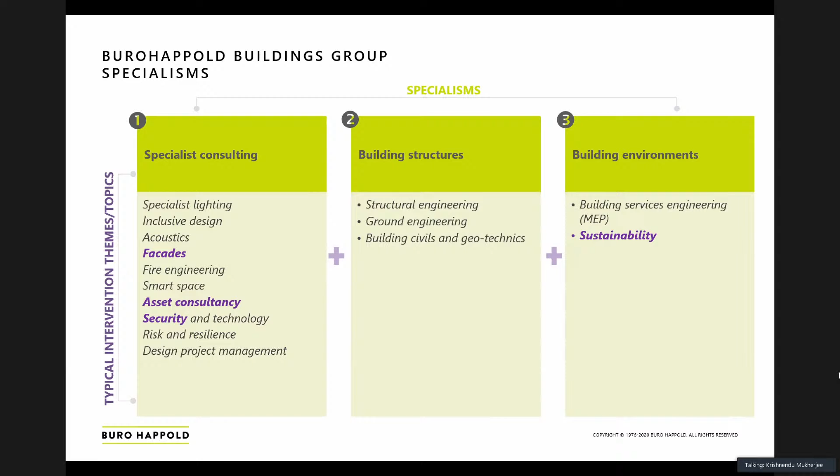So we do work in different scale. We work on single building projects, we do campus kind of projects where there are 8, 10 multiple buildings, and we do at a city level also, like a township and all. And the sectors that we work on: air and rail, commercial, cultural, education, science and technology, sports and urban development.

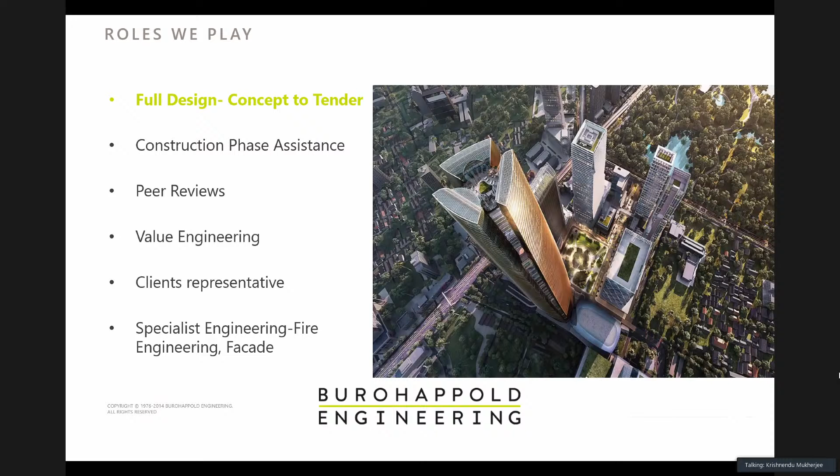In India, because of the market, most of our business is in the commercial segment. When it comes to commercial segment, we include residential projects, hotel, office, mixed use—all kinds of projects come under commercial. We do full design, concept to tender design, that is called cradle to grave. We do construction phase assistance, peer review, value engineering, client representative, and specialist engineering.

Due to a shortage of time, I will not talk about what we do globally, and I'll mainly focus on India. In India, we have been working since we established in 2008, 2009. I was the first person to join this organization, and in the last 12 years, this is our clientele.

Most of the top tier, leading developers of India are our clients: Lodha, Piramal, Godrej, Omkar, Supernova, Supertech in Delhi, South India, SAS Infra, Embassy, My Home, RMZ, Prestige. Most people involved with real estate know these are leading developers in India, and we work with almost all of them except the red ones - Kalpataru, Shell, Oberoi - with whom we are in various stages of discussion on new projects but have not yet worked.

Most of these projects we are working on, I think most of you who are architects can correlate all these names - HOK, Benoy. With all these people we are working, and this office is working with them on multiple projects in India: HOK, Pei Cobb Freed, MEC, Foster's Partners, UHA, KPF, Callison, SOM - we are working on multiple projects with all of them. In India, the local architects we work with are SSA, PG Patki, Kapadia, Hafeez Contractor, DSP, and others.

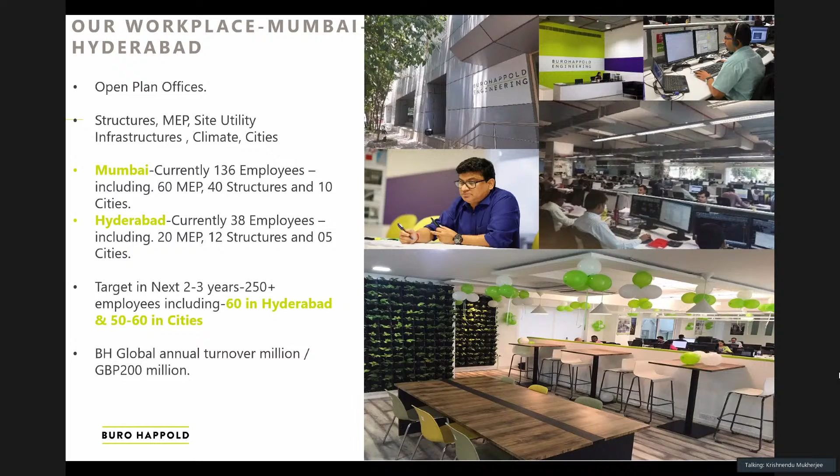We have two offices, one in Mumbai and one in Hyderabad, roughly 150 people total. Mumbai has around 140 people - 60 MEP, 40 structure. Hyderabad has roughly 40 people. Our target for the next 2 to 3 years is to be a 250 people business across Hyderabad and Mumbai combined. Our total turnover of Buro Happold Global is 2,000 crore.

I will quickly go through the projects we are doing in India. Most of our projects are tall, large or complex, and multidisciplinary. In the building segment, these are projects we have designed that are completed or at various stages of construction, some already completed.

Top left, Omkar 1973 in Mumbai - a 300 meter tower, three towers, 30 lakh square feet, with Foster's as architect; we did the structure and MEP design. In the center is the tallest residential tower, designed in Mumbai with Lodha developers, called World Tower. It was designed for 117 stories, 423 meters, and has been built up to 85 stories. It was designed and built on the premise it would be 117 stories, but civil aviation restrictions now cap it at 85. Pei Cobb Freed from the US is the architect.

On the right side is Supernova, a 70 lakh square feet project in Noida with a building and a tower. The central round tower is 85 stories, expected to be the tallest in Delhi, while the Mumbai tower is expected to be the tallest there - so these are both the tallest towers in India. We are involved in the design.

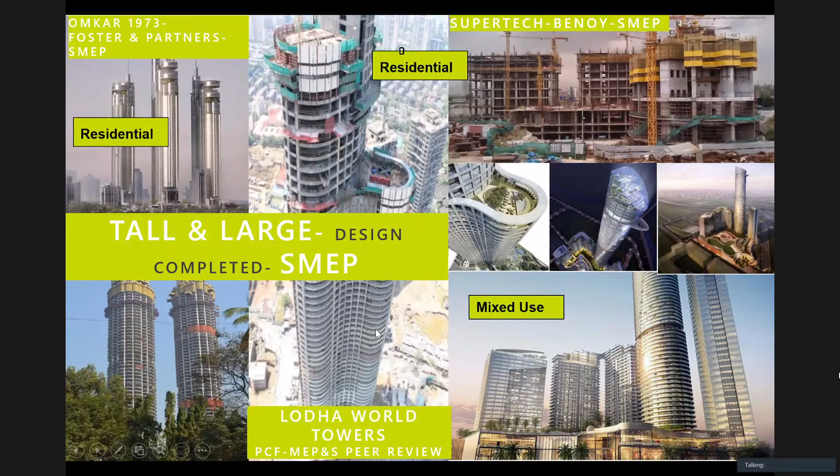These are residential, high-end, mixed-use projects. Lodha is one of our repeat clients - we handle most of their large, tall, complex projects. Top left shows a 50 lakh square feet, 3 tower project; the left one is the World Tower, designed for 117 stories, capped at 85. The middle one is 60 stories, the third is 70 stories. At the bottom right is a six tower, 1 crore square feet plus building, with towers at 75 stories.

This one is a Trump Tower, and then the top is a 1 crore 40 lakh square feet township, 88 acre township in Thane. Again, Lodha, Hafeez Contractor is the architect, and this 1 crore 40 lakh square feet project will house around 50,000 people in this township. These are again residential, commercial.

Piramal is our repeat client. Most of these projects are designed by international architects. Top left is a 40 lakh square feet, 300 meter, two projects, 2 towers. Make is the architect, now taken over by SSA for the rest of the work. Then these are various projects. The right one has KPF as the architect. The center one is a 40 lakh square feet project in Thane, with HOK as the architect. The bottom one is a 30 lakh square feet office building project, with Callison as the architect, so and so on.

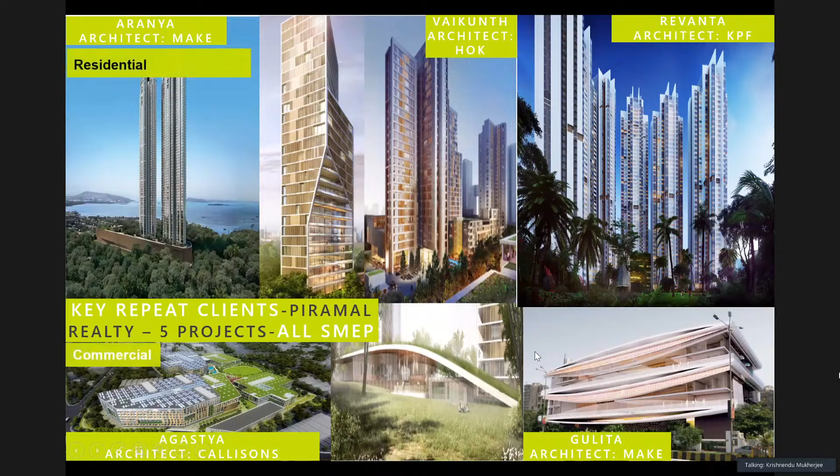Godrej is our repeat client. This was the first project we did in Revit BIM. SOM was the architect. We did structures and MEP, 12 lakh square feet, 18 story building. We did structures, MEP, and architectural, obviously by SOM, and we did SMEP in BIM. We are right now doing another repeat project with Godrej, a Taj Hotel, where we are doing SMEP.

WATG is the architect. I will quickly go through. This is a 300 meter tall, 2 buildings with Prestige. OMA from Netherlands is the architect, 22 lakh square feet, we do SMEP. This is another OMA project. Prestige is the client, OMA is the architect, office and hotel, totaling roughly 40 lakh square feet in Bandra.

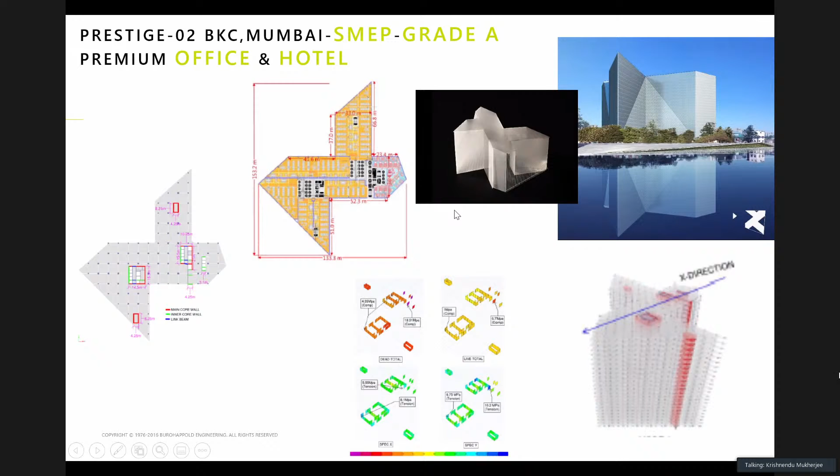This is the Supertech project I spoke about a while ago. This is a 70 lakh square feet project. The center one is an 85 story building. We completed up to DD and then it has been given to the local team. The building is, I think, at 60% construction stage in Delhi.

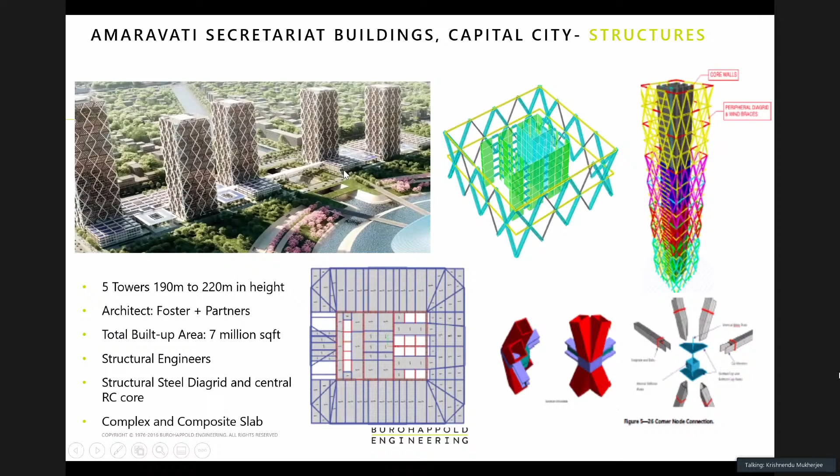RMZ, we are doing a 60 lakh square feet project in Mumbai. SOM UK is the architect, and we are doing structures for this grade A office. Lodha Park, I spoke about a while ago, is an 11 million square feet project, 80 story, 6 towers, one is Trump Tower, on 7 acre land.

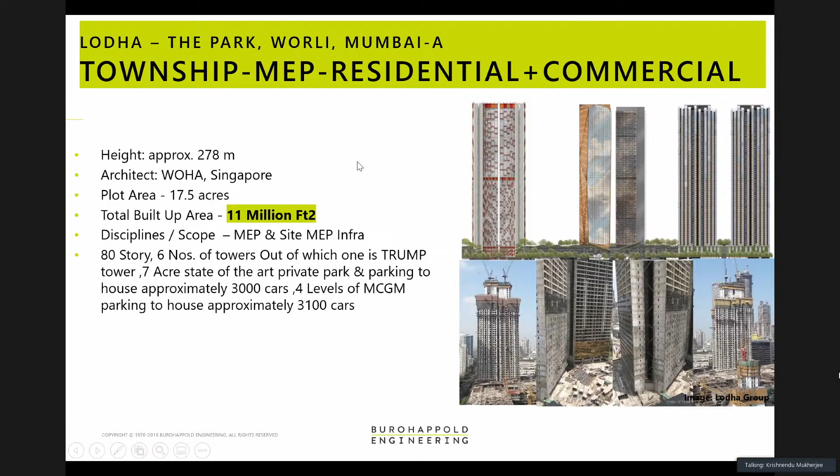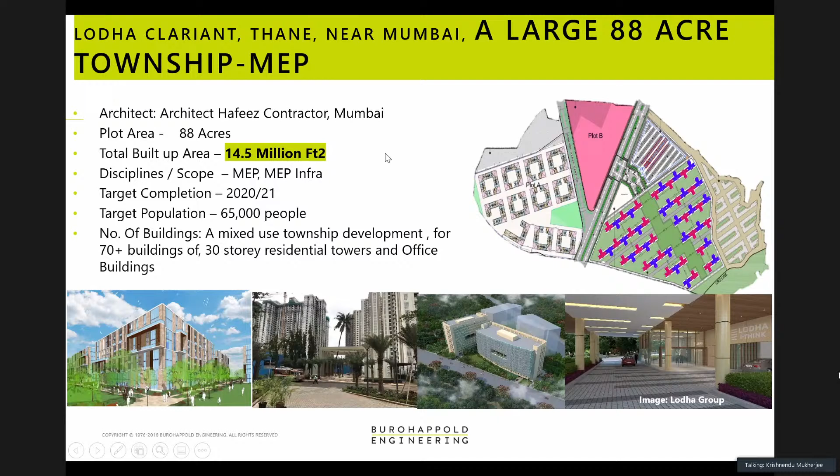This is in Thane, which I spoke about a while ago, a 1 crore 45 lakh square feet project. Hafeez Contractor is the architect. 65,000 people will be staying there. 70 plus buildings are there, all 30 story plus. These are all large projects done in 3 phases.

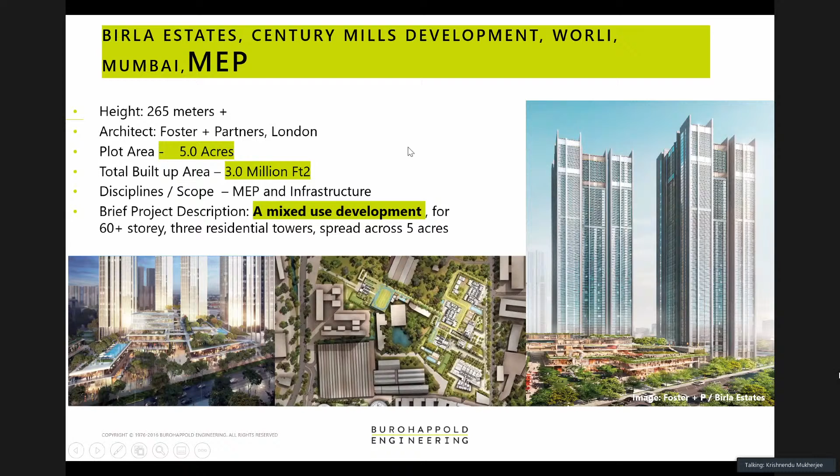Piramal, Birla is another client, 265 meter tall, 3 buildings will be there, 3 million square feet. Foster is the architect, mixed use development, and we are doing MEP for this project.

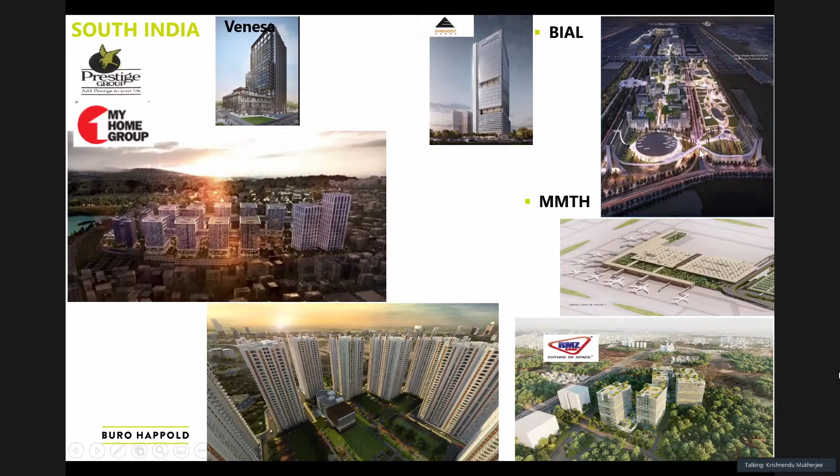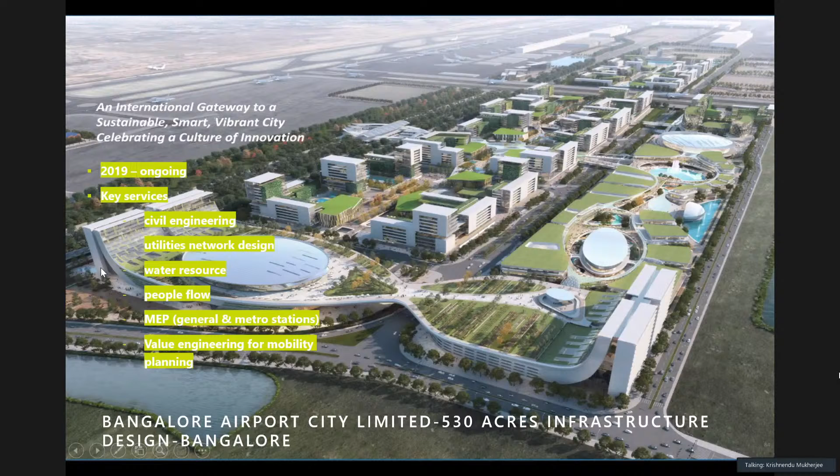In cities, we did, I can say, master planning. So Bangalore Airport City, 530 acre, we are doing civil engineering, utility, water resources, people flow, value engineering. We are doing another project, the Embassy Business Hub, 110 acre, where we are doing civil, transport, water resource, utility, energy, and waste management.

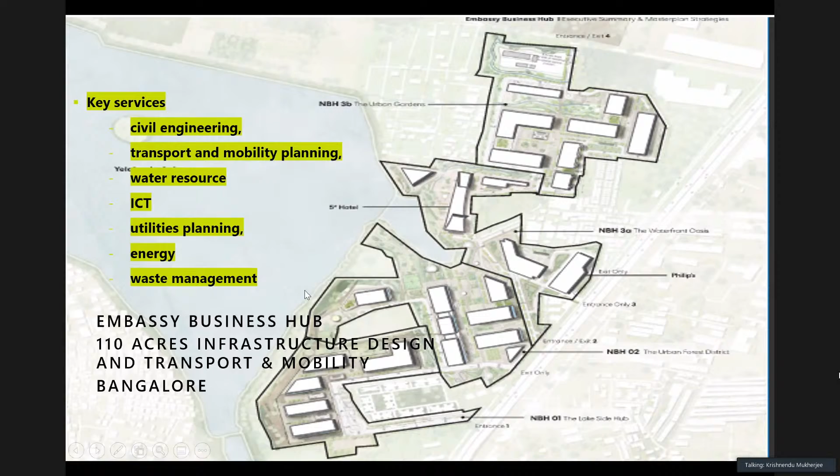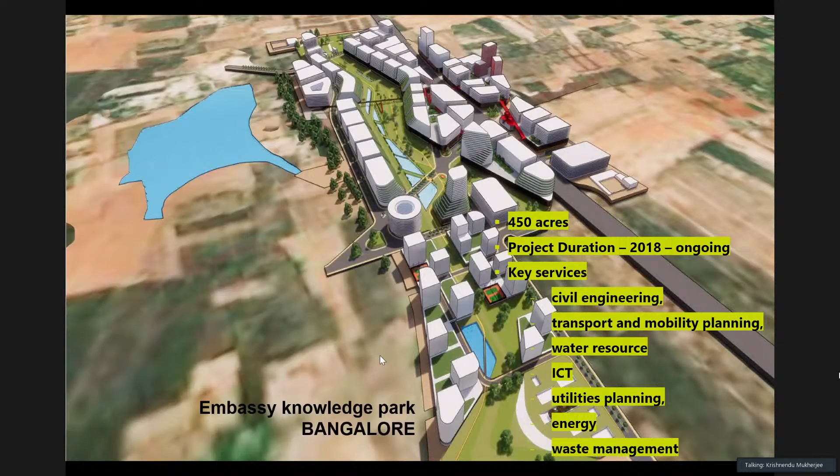This is another 450 acre project in Embassy Bangalore. We are doing civil, transport, engineering, master planning. We are also, this office, our business in India is also involved in doing some work jointly with other offices.

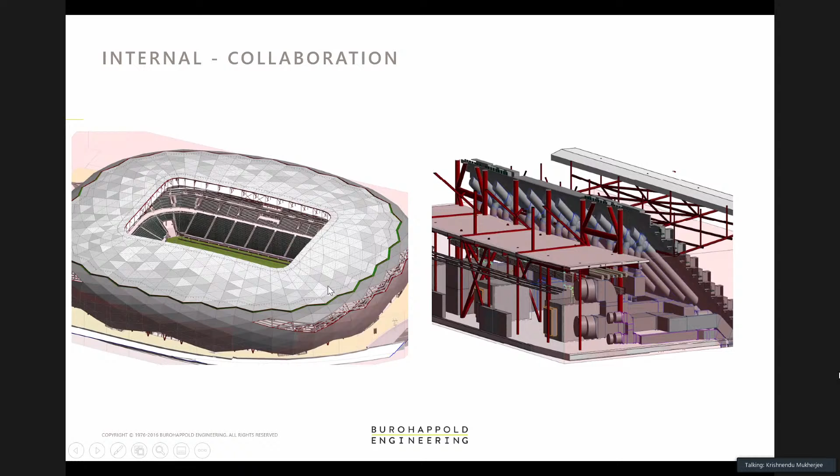We are doing this work across 10 offices, and India office is also doing some part of that. The purpose is to do work together, do knowledge sharing. So basically they learn from us, we learn from them. So there's knowledge sharing, and that is the purpose.

Now coming to technology. So all these projects that we are doing, how are we using technology. Technology means not only working in 3D environment, not only working in BIM platform. Technology for us is many things. We are using multiple tools and technology in facilitating our design.

Because you can see all these projects that you have seen, the scale of these projects is huge. So they are large, they are tall, they are complex, they are iconic. There are multiple stakeholders involved, so coordination and accuracy is important. So how we are using technology and innovation to add value and facilitate our design.

So we are multidisciplinary, so we call this ingenuity. What is ingenuity? Ingenuity is define the problem, understand the requirement, assemble all the specialists. We have all the specialists in-house. The specialisms can be structures, MEP, facade, IT, security, acoustics, so all the specialists putting together, and basically we interface with them.

So this is basically, the objective is to do integrated design. In an integrated design environment, the design is as strong as the weakest link. So if one discipline is weak, it can spoil the entire design. That's why this link is very important, that integrated design is something we give value to.

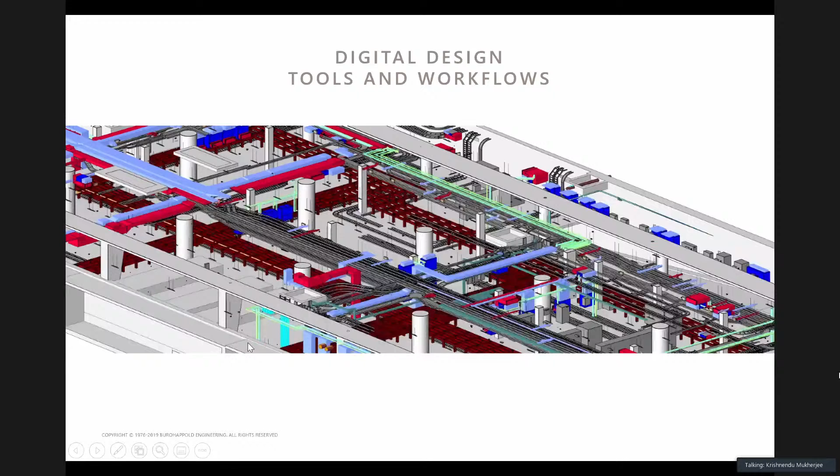Obviously we use digital design, tools and workflows. So how do we use it? There is drafting. So when we talk about BIM, there is a model being created, which is a drafting model basically. How is the drafting model created?

On the basis of design calculations, which we call analysis. So design calculation, the pure engineering work, design, analysis, calculation, that we call analysis. There are multiple analysis models which are run by the engineers. Our engineers use various multiple softwares depending upon discipline, and they do calculations, modeling, and on that basis they generate analysis. Then those analyses are transported to the BIM, to the Revit model, and then people start doing the modeling. There could be technicians, there could be other engineers who are doing this.

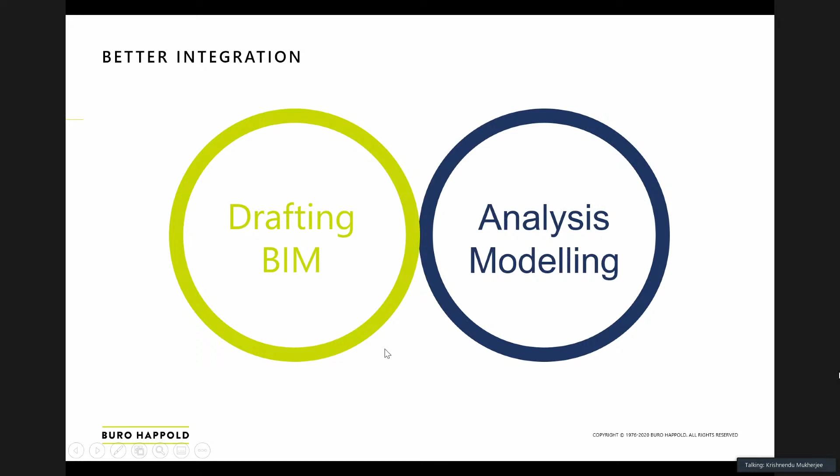So generally, so far, how it is happening is that analysis modeling used to be run independently, and then the information is being transported to the drafting model. Now the effort is to put both drafting and analysis in a single platform so that drafting and analysis are joined up. So how can we do this?

There may be calculations done in Excel. There can be calculations done in IES, which is a thermal modeling software for MEP guys. Similarly, there may be many other calculations done by our structural guys in different softwares. There are other specialist engineers that run many other softwares.

So all these are being connected with the Revit platform through some scripts, so that to the extent possible, these things are automated. Whenever there is a change in any calculation and design, that gets automated to the extent possible and reflected in the model platform, that is the Revit platform. Obviously, it is not a final product because this is a work in progress, and continuous research and development is happening across our organization and across the world. So what they're doing is a lot of scripts are being generated and developed, so that it's a work in progress.

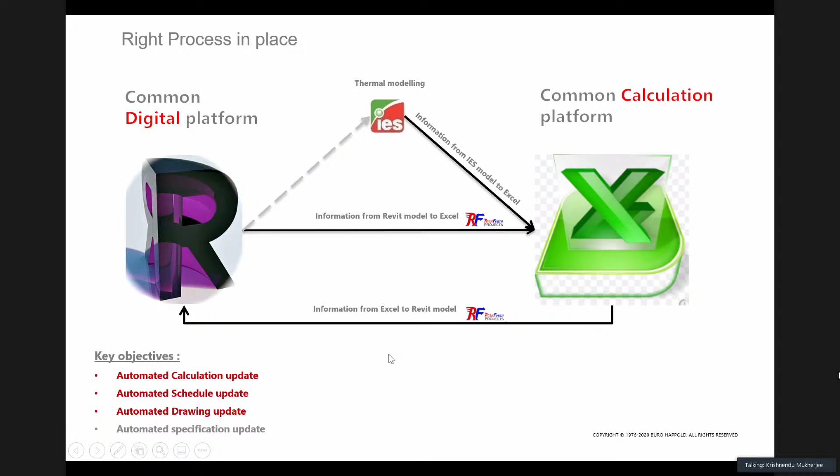So how are the things linked? We are also a work in progress. I can say till today, maybe 30% of the things we have been able to automate. There's still a lot of work to be done, but there are many things that are possible. We are automating it so that manual errors can be avoided and calculation, analysis, design can be linked to the digital platform, the model platform, through script writing.

So what happens is, if you are doing calculations, like a cable calculation in electrical, there's a software called Amtech. If I do heat load calculation in MEP, it is IES. Similarly there may be other things, structures, and now these are being automated through scripts and connected to the BIM model with the Revit model. From the Revit model we can then generate schedules, drawings - could be 2D, 3D, schedules, cost estimation, everything, BOQs, everything. That would be a byproduct from the Revit model.

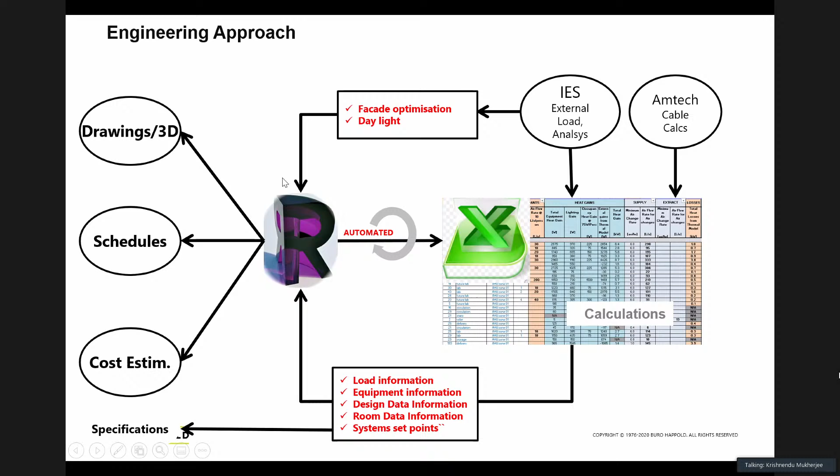So linking all these things, that is the objective. Load information, equipment information, everything can be automated, the calculation connected with Revit, so that once you get the model, you extract schedules, BOQs, cost estimates and drawings, which can help in our specifications and tender. We are using a lot of analytics and data, because today we are all hearing about virtual reality.

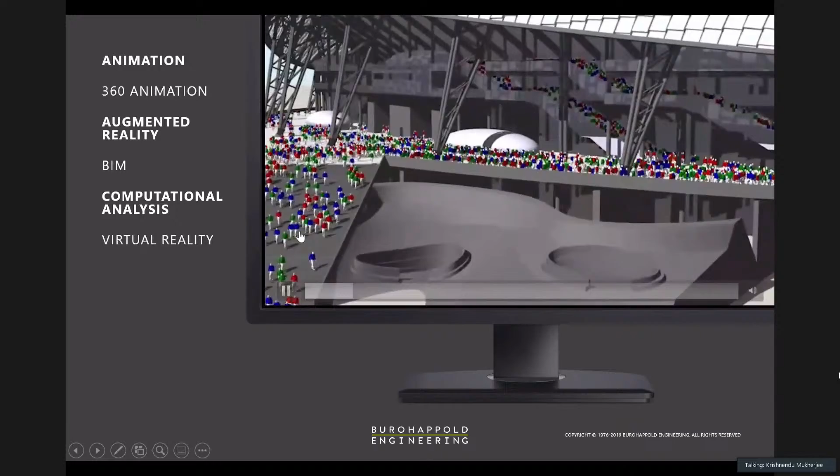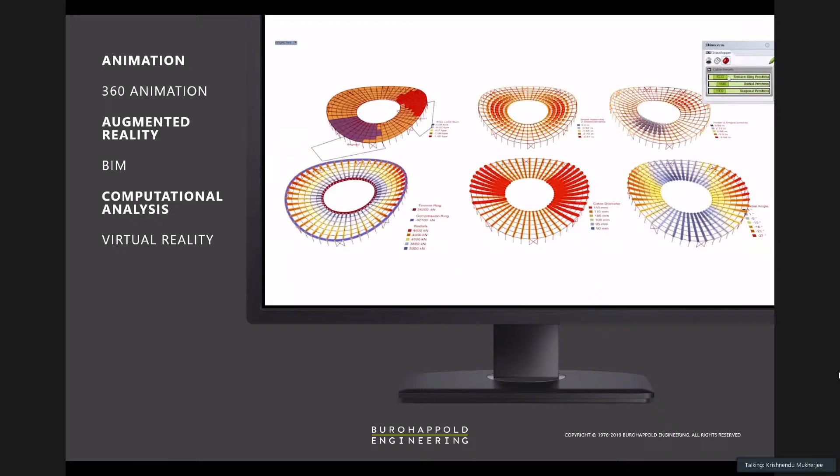So wherever possible, we are using augmented reality, BIM, computational analysis. So this is what you are seeing is the crowd flow analysis, this is called mobility. There are software where we are doing people flow analysis. We are simulating how, in any event, any convention center, any project, we do crowd flow analysis, so that we can do proper traffic and decide all the paths, the design, so we can visualize it and design it properly.

Similarly, through various script writing, these are all structure script writing through which we are automating our structural design, so this can simply be represented in a visual way which we can understand.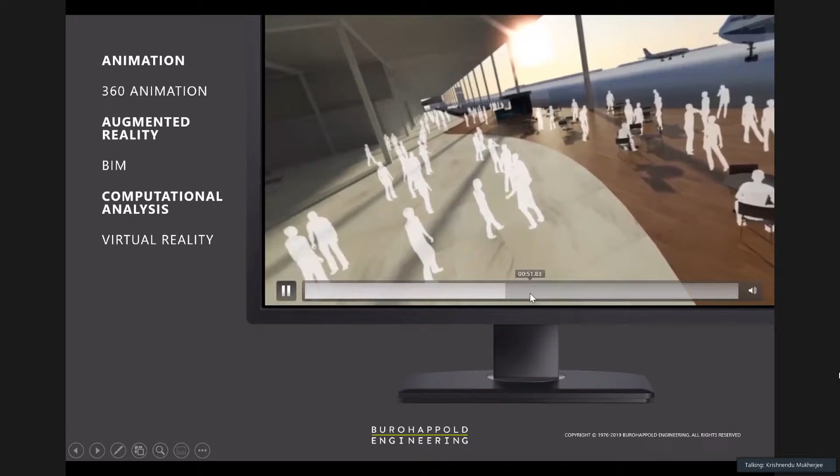This is a project called Museum of the Future, we are doing it in the Middle East. So this kind of simulations we can do. These are some of the scripts and how they run, I'm just showing you.

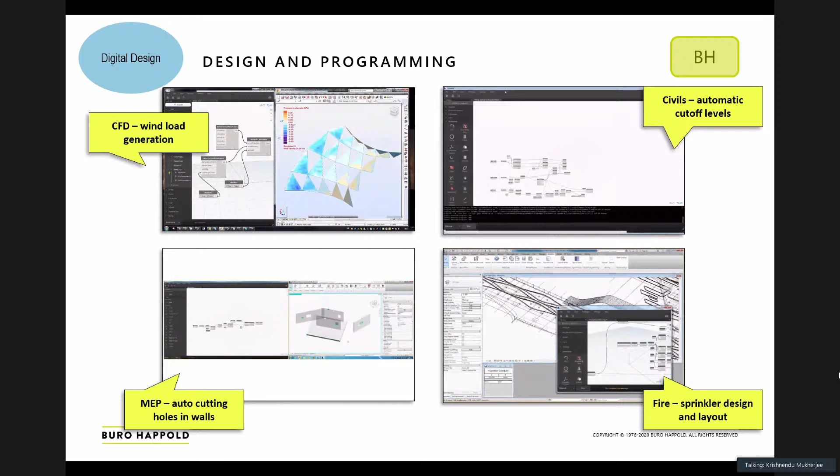You can see at the bottom this is the MEP auto cutting hole. Through scripts, the drawing is linked such that whenever the MEP guys are putting any services in a Revit model, and everybody is working on the same platform in Revit - the structures guy doing his structural design, MEP doing MEP design - whenever an MEP service is passing through a structural member, because of this script connection and script writing, wherever the MEP service is penetrating any structural member, an auto cutting hole is immediately reflected there, and then our guys can go size it so nobody misses it.

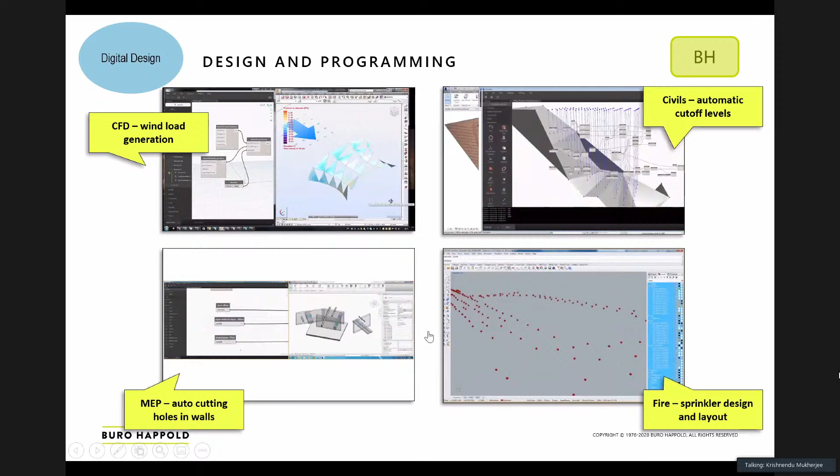Similarly, there are many things - with simple logic, fire sprinkler layout can be automated, then wind load, then civil automating cutoff levels in piles. So these are all live scripts that we have implemented in our projects, done through research and innovation, through our teams, through pilot projects working on projects.

Once something is developed, it is then tried, tested, validated by multiple offices. Once everybody validates it, we address all the shortcomings, and then we use it in our projects.

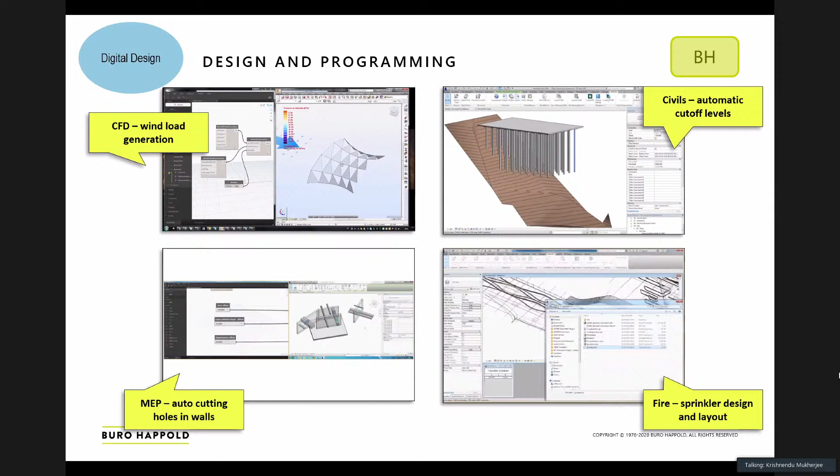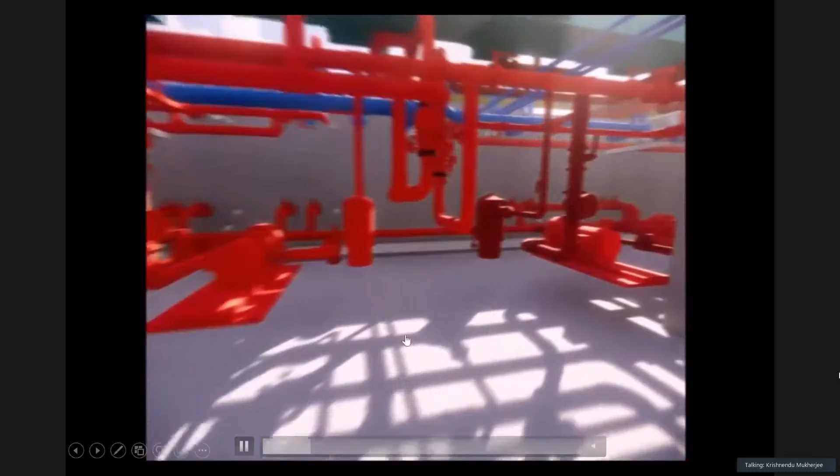So you can see some of this - this is a structures MEP project in Mumbai we are doing with Birla. You can see the final product, this is a walkthrough with all these things, and then we do all this coordination, clash detection. After that we can run it through the clients, through all of the stakeholders, and everything is coordinated.

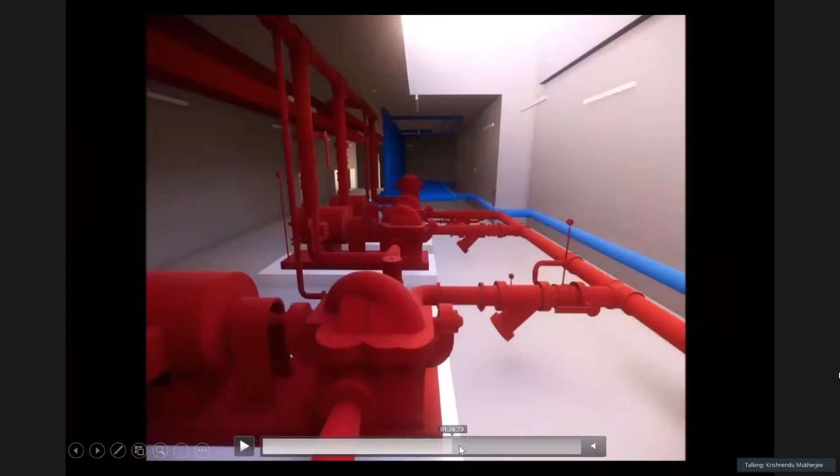You can see all the sleeves, you can move around, you can see how the plants are going. You can see at the floor level, even the outdoor units, the sleeves, the cutouts, everything is coordinated. This is just an example of a service floor, 1.8 meter service floor.

The client was challenging us - normally people think the MEP is taking a lot of space. So there was a debate, 1.8 meter height they have given, and they said it's too much, remove it because we have height issues. We did this coordination and showed the client how the service is running in a service floor, so it's easy for everybody to know there is no wasted space, everything is efficiently used. This was shared with the architects and the clients in a real sense.

So these are the outcomes of using technology. I think your visibility of the design is better, you know what you are doing, and you can see how the things are getting coordinated and integrated much before the project is actually built.

Now, how do you do technology? So as I told you, a lot of scripts are being done. With that, obviously you can improve efficiency, and at the same time errors are reduced.

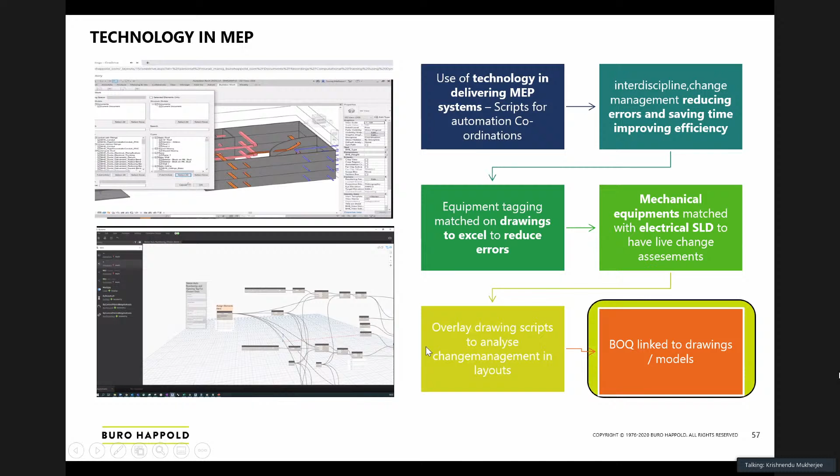Once through script, we can prepare that, and when we go to actually do procurement, the BOQs can be linked to the drawing. Now, how can the BOQs be linked? Once you create a model in Revit, from there we set up parameters, and from there we can build up the BOQ. So the BOQ is generated.

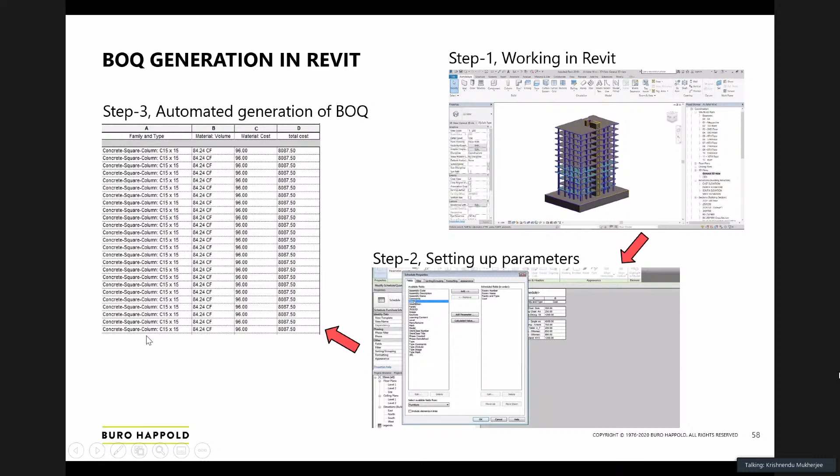It goes for procurement, it goes to the contractor, and the contractor can bid for it, the price for it, the vendors can price for it, the client knows what the BOQ is, and if we put the right parameters, no items are missed, and no quantity is lost.

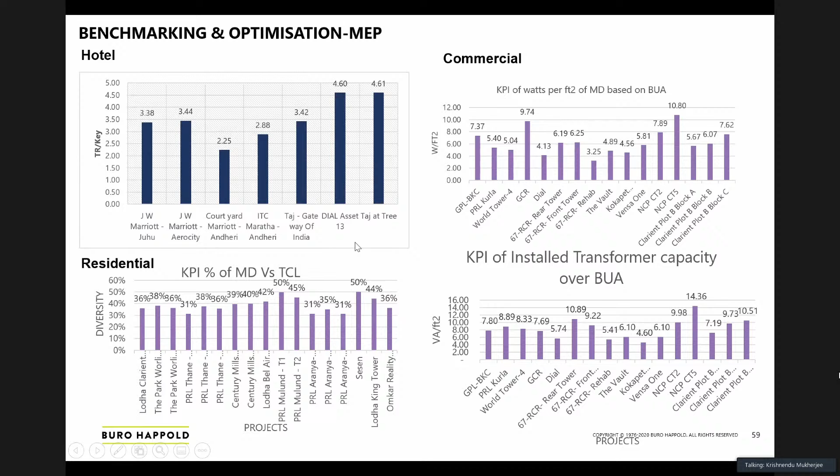Through all these things, we are doing a lot of benchmarking across projects, like across hotels, commercial, residential. So through that you can benchmark multiple projects. When you are designing a new project, you already have past benchmarks coming out of these things, and you know whether there's something you're missing in your design.

This is in structures. The input can be available in CAD, PDF, or Sketch. We have developed a script through which this PDF input can be converted to parametric 3D geometry, and that geometry can be used for structures to run a model called an ETABS model, so they can run this in ETABS.

This is through script writing. Though we are an engineering company, we actually have script writers within our office. Some are specialists in script writing, and some of our internal team has been developed who have domain knowledge in structures, MEP, and all, plus they develop scripts, so they know how to develop a script.

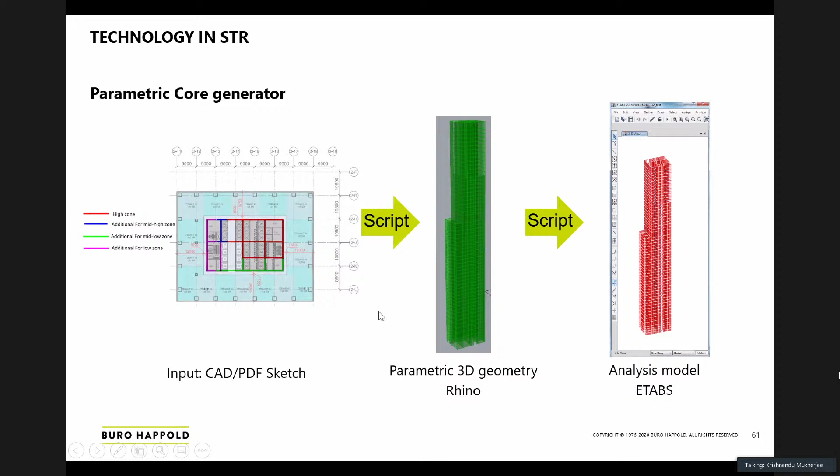This is another example of geometry. If architects give you a Rhino model, through script it is converted and used for ETABS analysis by our structural engineers.

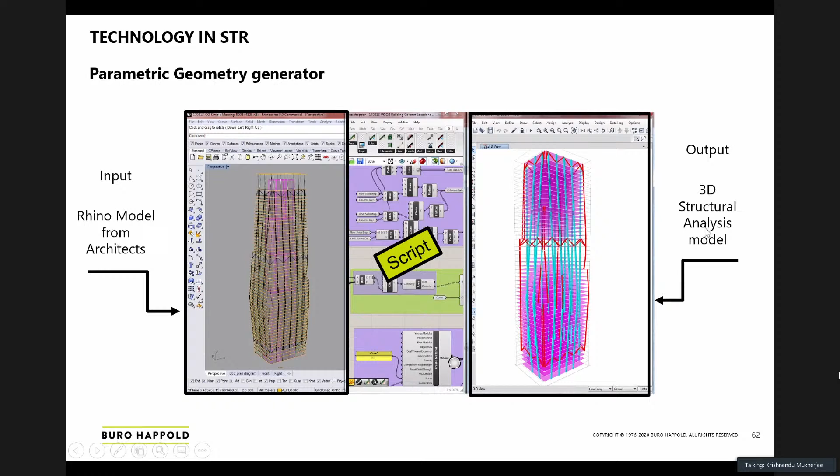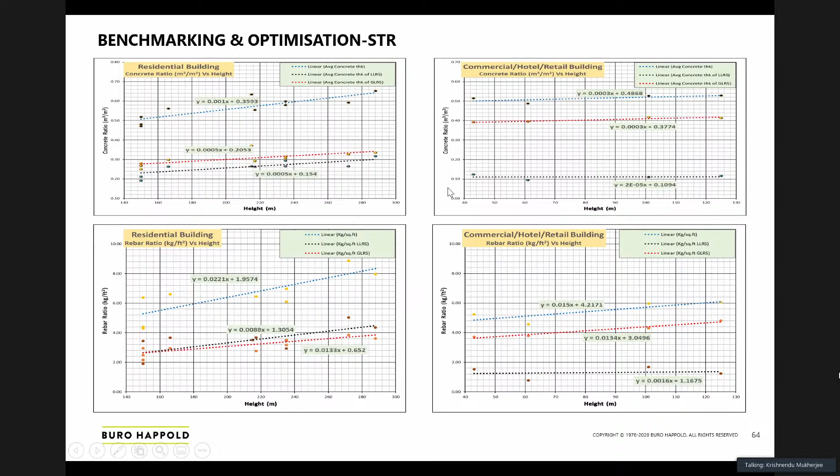And then again, multiple benchmarking can be done through all these things by height, so that you know what the kg per square feet or rebar ratio is, what the concrete ratio is - all these things can be benchmarked across projects and used for future projects.

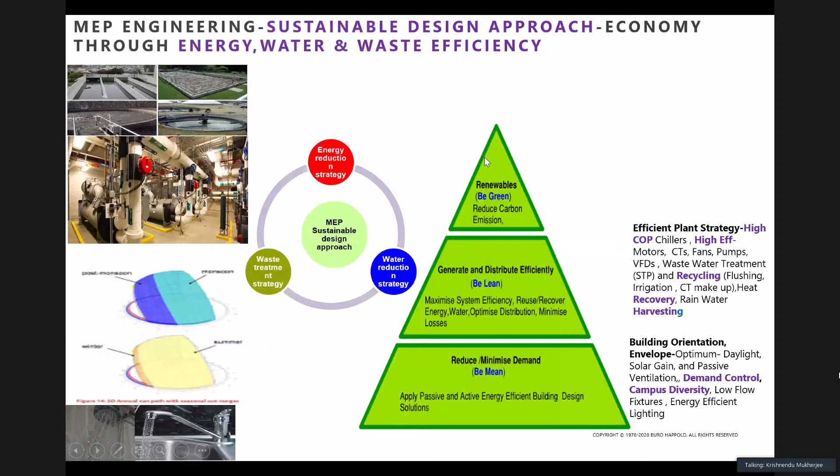Now we talk about race to zero. Many of you may have heard about net zero, then embodied carbon. We know everybody has a climate commitment, and climate commitment is related to sustainability. Now in sustainability, a lot of technology is used right from the beginning to ensure the design is energy efficient from the start.

There are many tools through which, before a project is conceptualized, when the architect works on massing, the project massing, you can run microclimate analysis and orient the buildings to maximize daylight, maximize shading, maximize passive ventilation - all the passive measures so that your electrical requirement is minimized.

Obviously there has to be a trade-off, because if you maximize daylight, more daylight will have some impact on the radiation part. So you can optimize that through microclimate analysis, right at the massing stage, so you can do the building orientation to take maximum advantage of natural ventilation through wind direction, and maximum advantage of daylight and cooling load, so your cooling load electrical requirement is minimum.

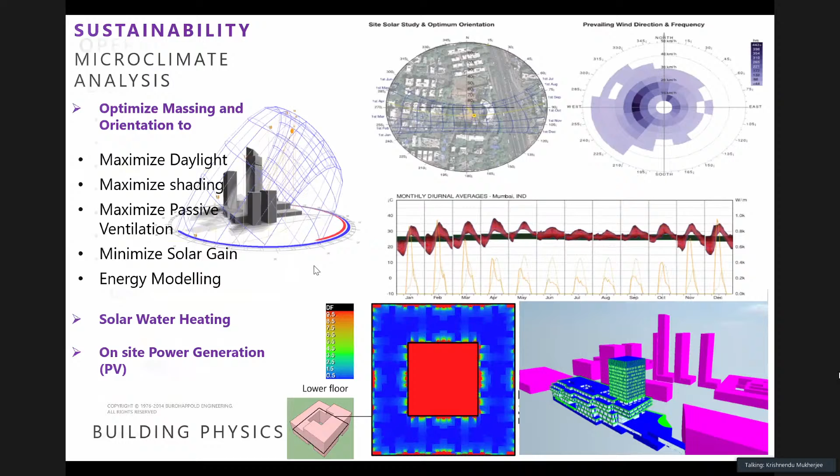So through that we can study operational carbon. What we do is, once we do that, we study what we call EUI, the Energy Utilization Index, converted as kilowatt hour per square meter per annum. So across buildings, we check, based on the design, what is my EUI factor.

So obviously with the EUI factors, we can work around it, and the effort is that as we move forward, this EUI value project after project should reduce, so that we move towards minimum carbon or net zero carbon at some point of time.

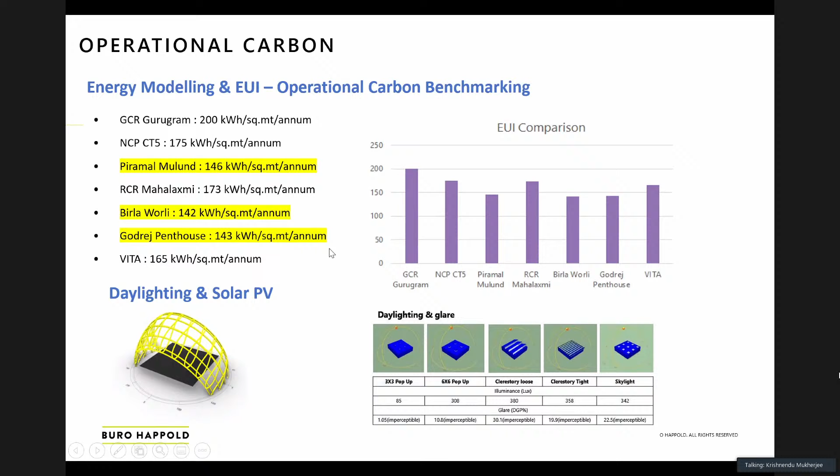Similarly, embodied carbon for the building. Embodied carbon could be for equipment also, for the building also. So right now we are focusing mostly on structure.

For embodied carbon, we are doing a lot of study and modeling, so that in a project, which is still in R&D stage in many places, it is right now focused mostly on A1 to A5, which is basically the material side, the upstream vendor side. So how the material is being produced, raw material transport to the factory, it gets manufactured, then it comes to site. So how we can reduce the embodied carbon for that.

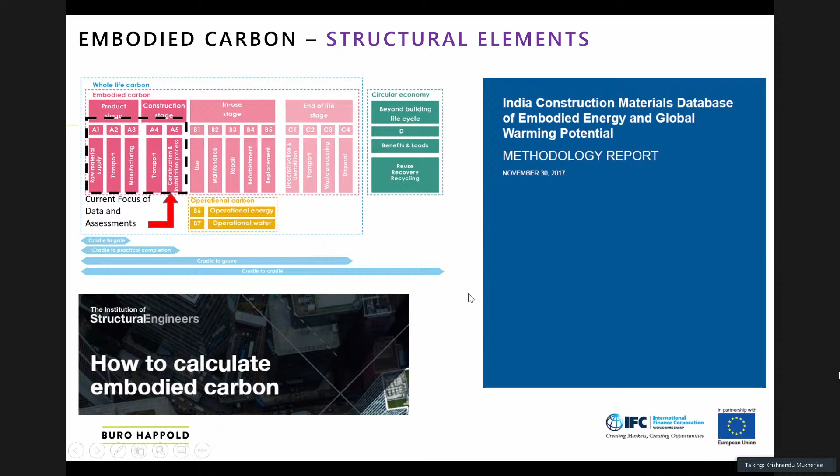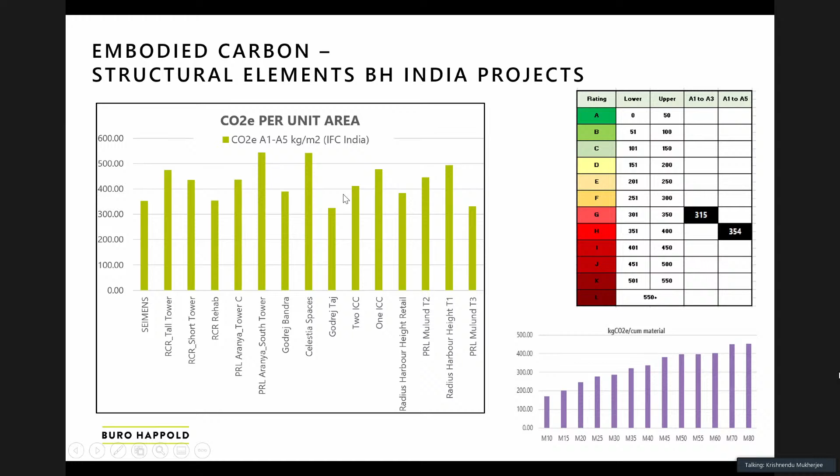There are many methodologies. We are developing a carbon factor and tracking it through our projects. You can see there's a CO2 equivalent for multiple projects, and we are doing a comparison. Right now, most of our projects are at G and H level as far as rating is concerned, but now we have to move above that. So the objective is to reduce the embodied carbon as we move forward.

Now there are some other technologies we are using. But before that, I'd like to give you some perspective: until now, the design of buildings was mostly building centric. The focus was primarily on how to improve building performance, how to reduce kg per square feet in concrete, how to have a very efficient lean building with minimal concrete ratio, minimal rebar, minimal electrical load, minimal heat load. So all our focus was about improving building efficiency, which is why our design was super building centric.

But what about the people who are occupying these buildings, be it office buildings or residential? What about people centric design? Many of you must be hearing that now the focus is not only building centric design, you have to design a building which is people centric also, so that the health, well-being and productivity of the occupants is taken care of. So now onwards, the focus is parallelly building centric along with people centric.

Now, how can you make it people centric? It's important that you have post-occupancy evaluation. This means that after people start occupying the building, you collect data on how it behaves versus the parameters it was designed for. Once we capture that data, it gives feedback to the design, so we know where we went right or wrong and can implement improvements in the future. That's why, apart from building and people centric design, the world is now moving to post-occupancy evaluation, which we call POE.

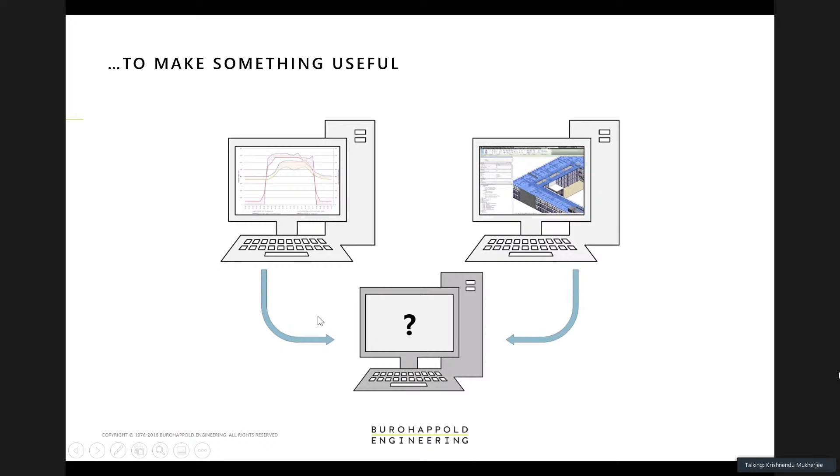So in a POE, what happens? On one side you have the building design information, and on the other side the actual performance. Design versus actual is analyzed, and you see where you have over-designed or under-designed, so that you can address it.

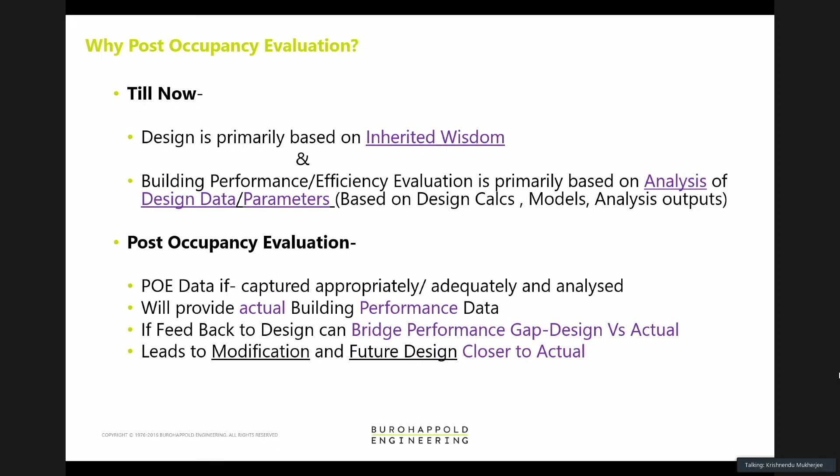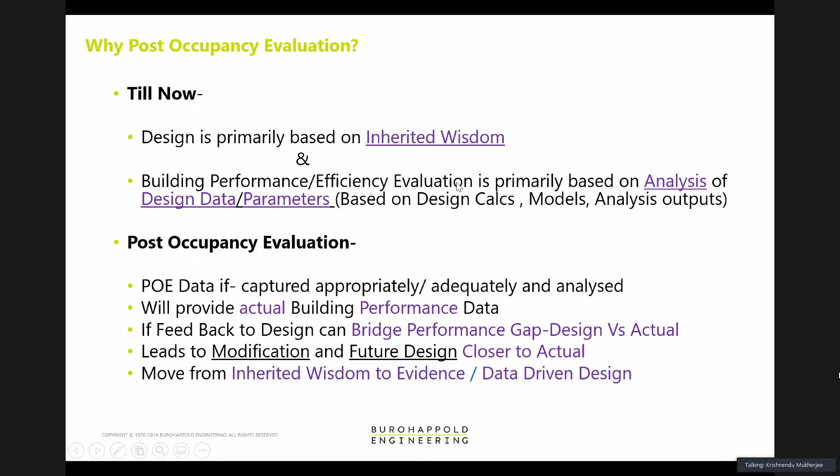So till now, most of our design was based on inherited wisdom — analysis of design, data, parameters, etc. But with post-occupancy evaluation, you get actual building performance data, and that feedback to the design bridges the performance gap between design and actual. This will help us in future to get closer to the actual design. So post-occupancy evaluation is a very big thing now — the move is from inherited wisdom to evidence or data-driven design.

So far, the way construction used to happen: the design team does their design and passes the information to the construction team. When things move from design to construction, there's a data loss. Then the building is owned by the operations people, and again information moves from construction to operation with another data loss. To avoid this, the way the world is moving is that design, construction, operation and outcome should all be integrated through a data lake.

So basically, if the design team does the entire design in Revit — as of now, today in India, the moment the project goes to site, nobody uses that 3D model anymore. But that is not the way it should be.

Basically from design, the 3D model should go to the construction guys. Then the construction guys should use this 3D model to do his construction sequencing, his material, his program, everything. And once the building is built, all those inputs go into that Revit design model, which has been passed to construction from design. Then construction will further hand over that model to the facility management guys, and they will use it and give the operation data. So that is the way the feedback loop completes.

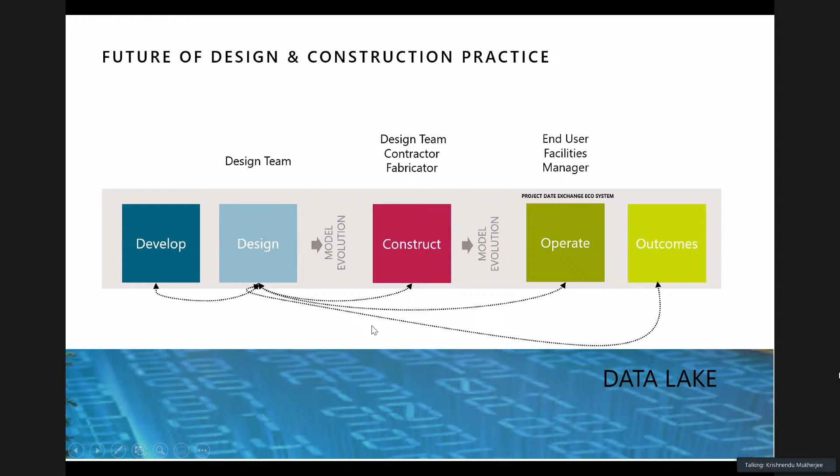Obviously, it is at a very beginning stage. It is happening globally, right? But not even fully. In the next 5 to 10 years, that is actually going to happen - one model which is created gets passed on to the construction team, and the construction team passes it on to the operation team, so that all the data is available. So the future is data to decision, workplace portfolio analytics, and some of this we are already doing in our projects.

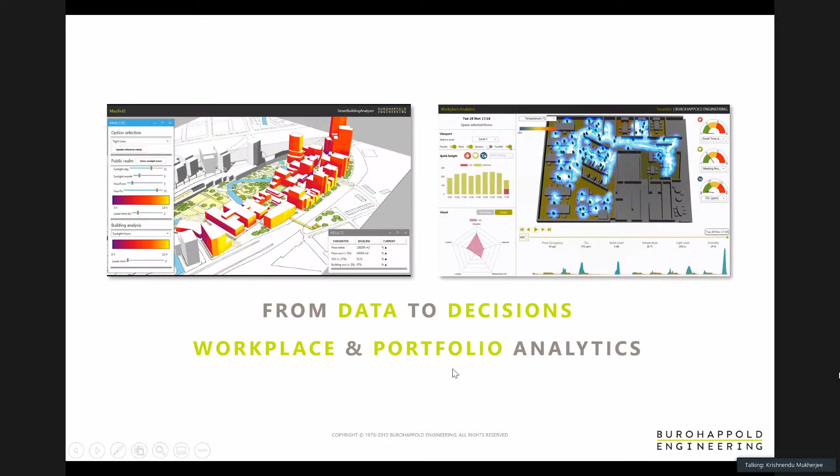I will tell you, this is a joint venture we are doing with GE. Vodafone, for their headquarters, has appointed us and GE, and we are working on a model for their existing office building. They want to know whether the office that they designed, built, and have now occupied - they wanted to do a post-occupancy evaluation, to see whether the actual performance is as per what they designed for.

GE is bringing the sensors, and our team, Buro Happold, we have a team called Smart Team with the domain knowledge. We are working with GE - their sensors are being put across the office, and we are getting real-time data. Our team is creating various scripts to do predictive modeling and see whether the performance - be it energy performance, carbon performance, space utilization - whether the actual performance is close to the design.

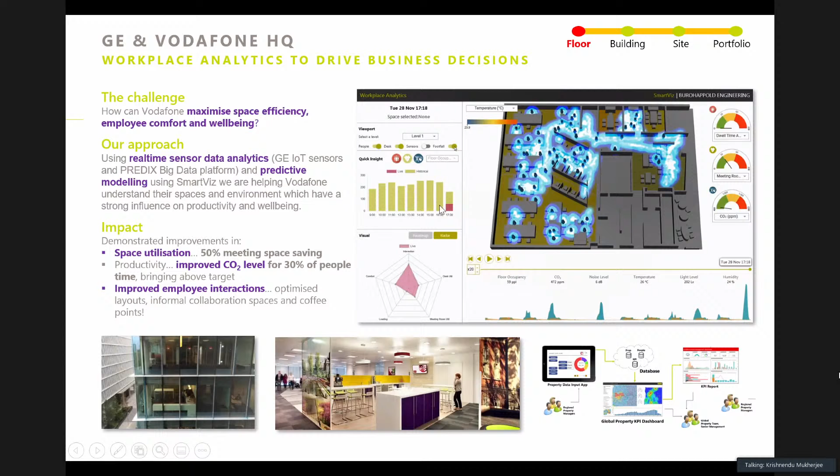So that kind of pilot project we are doing today - whether the carbon dioxide generation, CO2 levels, etc. - all these things we are doing as a pilot project. So if we do it for one office, they know how the performance compares between actual and design. We know the gap, and then it can be modified if required, or they can take care for new projects.

So this is called workplace analytics for projects. You can see this is a real script, the way it writes - it gives this after the data is taken and the analytics is done. On the basis of the analytics, they can generate multiple data points, whether it's CO, carbon dioxide, occupancy, inside temperature, air quality, or electrical power consumption - everything can come from that analytic, using the analytic tools and real-time sensor data.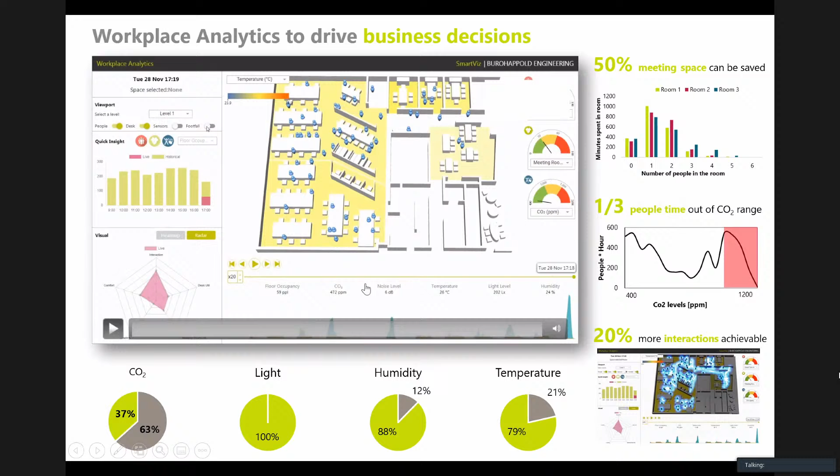This pilot project is getting generated, and we are investing in it. Obviously, Vodafone is investing in it too. Now this is for one building - they are doing it for one building. But Vodafone has multiple buildings; they don't have just one office. So that is called portfolio analytics.

Now the next stage is they are saying, okay, you are doing it for one office, now I have maybe 10 offices, 20 offices - create this post-occupancy evaluation data analysis for all my 20 offices, so that at the click of a mouse I can compare performance of building A versus building B versus building C. So it is an interactive dashboard - that is the next stage.

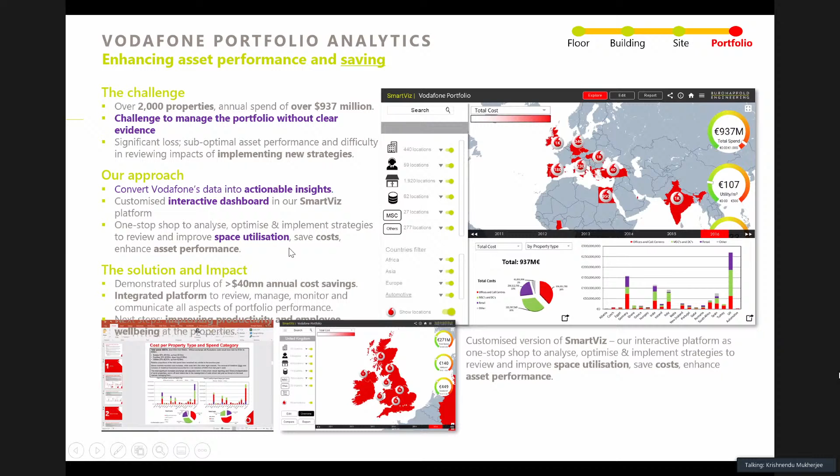Now with Vodafone we are working on this. So these are the ways the technology and the analytics are being used and going to be used. Right now it is very new to India, but this is what we are also talking to many of our clients about, and maybe this year, with one or two clients, we will be starting a pilot project in India too. That is called portfolio analytics.

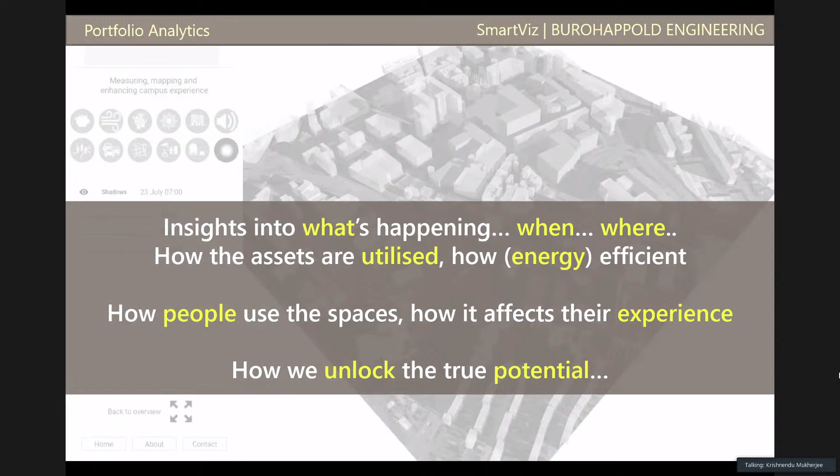So this is something I mean what we are looking for. I think it is exactly 6:41, so 40 minutes I have tried to walk through, giving a quick glimpse. There is much more available, but for this kind of presentation, I have tried to give you just a walkthrough of what is happening, how technology is being used, how it is going to be used, and what are the things in development. So I think this is the end of my presentation.

If you have any queries, any questions, I am happy and I will try to answer them.

Thank you, Krishnendu. That was really nice. A lot of new terminologies, and honestly, the way it started, the kind of projects, the scale you are dealing with, naturally brings a lot of diverse specialization into that. With that comes the collaboration, and naturally the BIM workflow is perhaps the most ideal solution. But I think a couple of things were really fascinating to me. Let me say a few sentences before Hetal takes it over.

I was really fascinated by this entire computational design. The way you said that you achieved your 30% goal of moving in that particular direction, because each specialization has their own software, and then they bring their data into the BIM model. Versus now you are saying there is an integrated manner in which everything is being fed into the BIM model itself, happening with the help of scripts and computational design. That was something new to me.

And the last thing that seriously blew up my mind was the portfolio workplace analytics. I think it's a step we are taking in the direction of big data, data analytics, and what slowly AI can do for the field of large scale projects. Thank you so much, it was really nice.